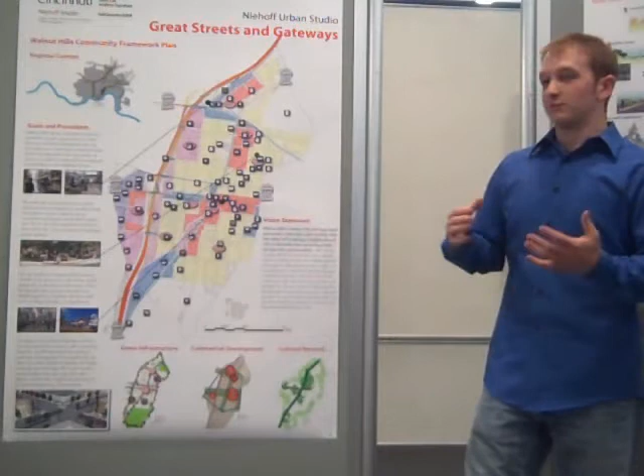So we began our framework plan with picking out one of the options of the interstate changes, and we picked S2A, which is going to put interstate exits here and up here, and then also linking that with a light rail transit system. That's a more regional scale, and then breaking down the neighborhood into several more individual pockets and focus on the community that way.

In terms of the types of things that we're trying to do, we want to create what we're calling a cultural identity for the neighborhood. We think that's what's going to bring in people as residents and what's also going to bring in people as visitors. So we're focusing on residential activity in types of quadrants, new business developments, historic type business districts, and cultural and community centers.

A green infrastructure system for aesthetic, ecological, and economic purposes, and we also are trying to, in terms of transportation, integrate streetcar into the city's framework as well.

So I guess three of the main group areas that we focused on are our green infrastructure, our commercial development, and our cultural network. And I think the first one to talk about is commercial development.

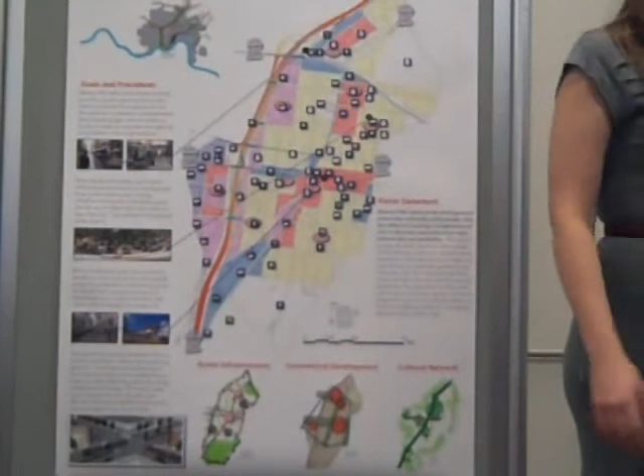Yes. My name is Andy Sanchez. I did the commercial and economic development. Here's my poster here. Could I ask you, would you mind pointing out and guiding us through those lower diagrams? Sure. So why don't you begin?

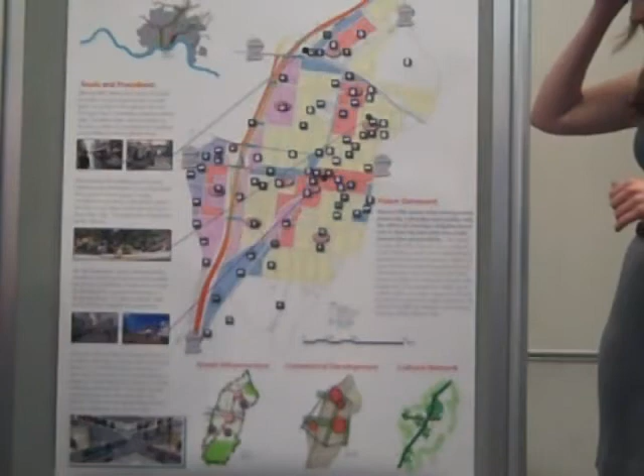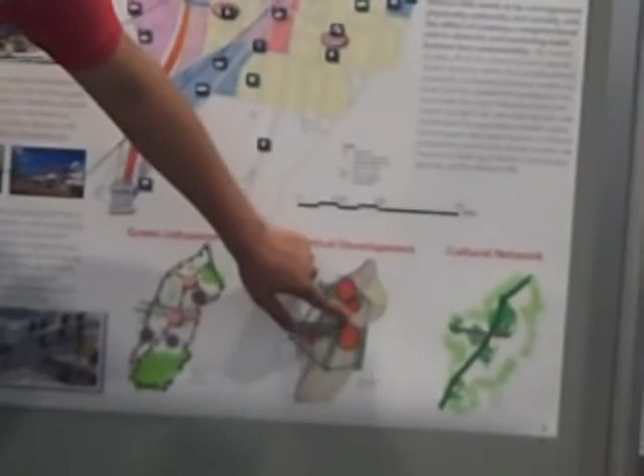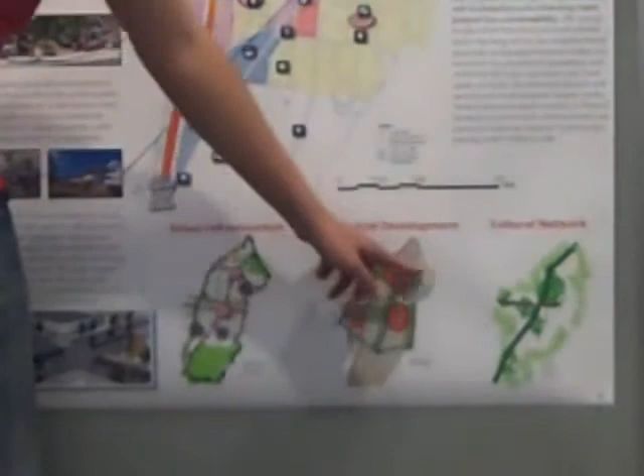Okay, so this is the commercial development. Green is the business corridors. This is the McMillan-Taft one right here. Here's the Gilbert corridor, Martin Luther King, and Victory Parkway. The reds are commercial nodes after our proposals, and the blue lines kind of go to my theory, which I'll explain right over here.

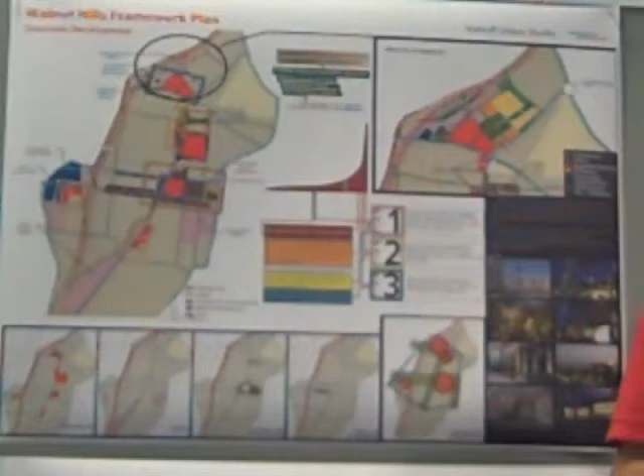The way I started out is we determined that the best aspect of the existing neighborhood is the business district. It has a lot of very unique architectural significance. There's some really cool buildings back there, a lot of which have fallen into very poor shape. We saw that as a big asset for the community, with the potential to put in some very unique character-driven businesses.

Going into the housing thing, it came out to like, okay, who's going to live here? Basically we determined that there are going to be families starting out — these are the new residents — and younger professional people. Those two demographics, mainly the young professional, one of the big things that seems really important to them is culture. They want the area they live in to be culturally significant and have its own identity, not like the suburbs.

Which brings us to this right here. So what we determined, which kind of guided our theory behind our designs, was: say this is a market, any market. This is the short head of the market, meaning that here is where you're going to find luxury lofts, condominiums, Starbucks, and Snuggies — just all the stuff that's cool and trendy. The in part of the market, profits going up this way.

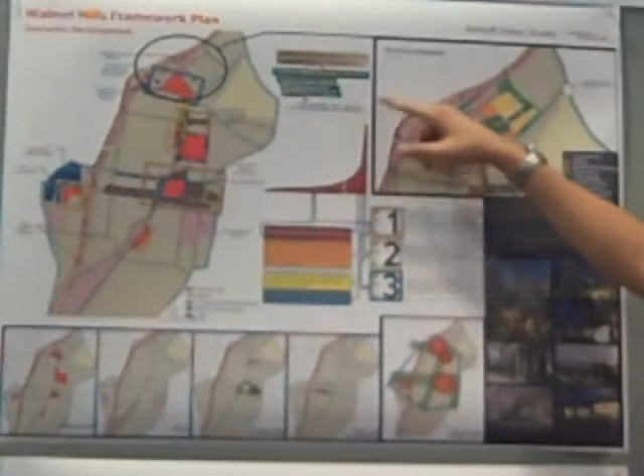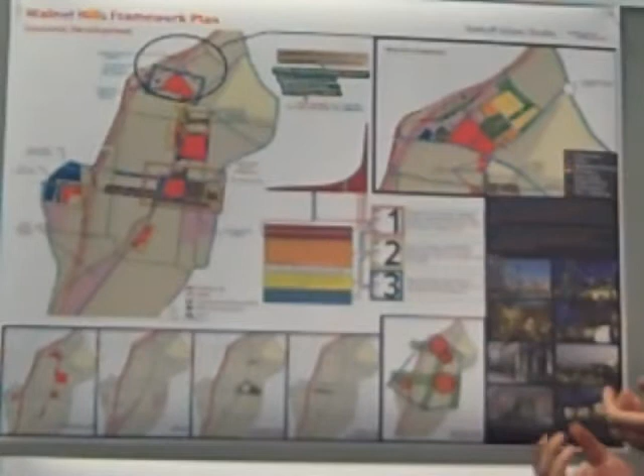The in part is more like how internet companies seem to make their money — they go for more personal approaches, and they'd rather make less money over longer periods of time, creating a sustainable business investment. Now to apply that to the business and commercial development, we identified this right here being your standard shopping malls, gas stations, all that, with the other side, the long tail of the market, being your independent, community-owned businesses.

So with that, I broke the businesses down into 3 tiers. Tier 1 were pedestrian-oriented businesses. These are the businesses that we wanted to create culture and a sense of place, which are in the existing business district. Tier 2 are auto-oriented convenience businesses. The goal of these is just to grab passersby.

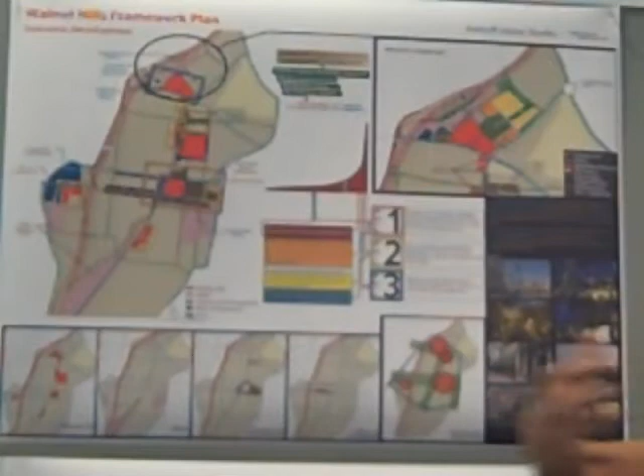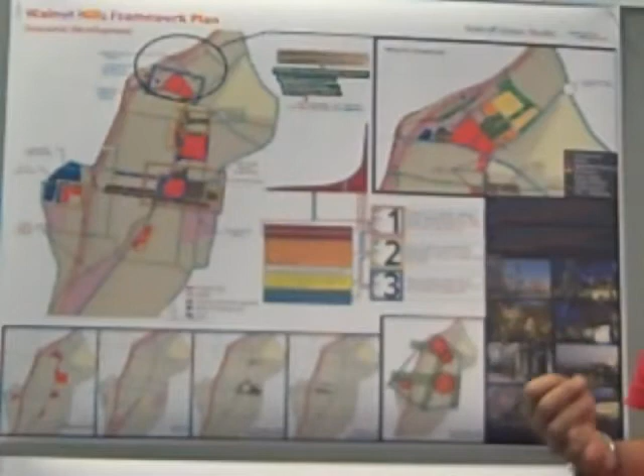So those are positioned up here to the north of the site, to the east, to the south, and to the west on McMillan where the new highway ramp is. In Tier 3, which are the large commercial businesses, we have one right here, our proposed grocery store, and the car dealership. I wasn't really sure what that fit into, but since it's very profitable, it fits into this category right here.

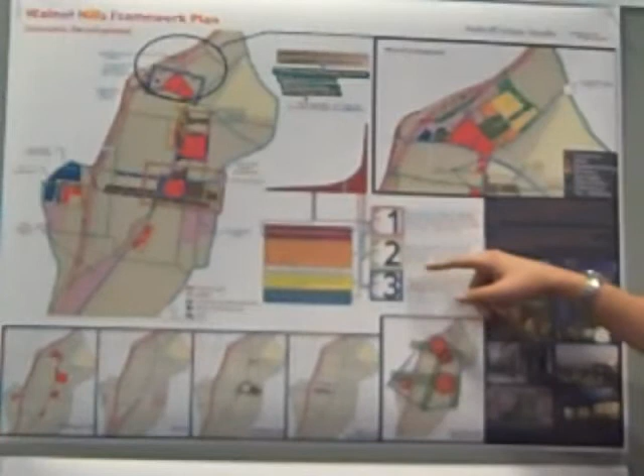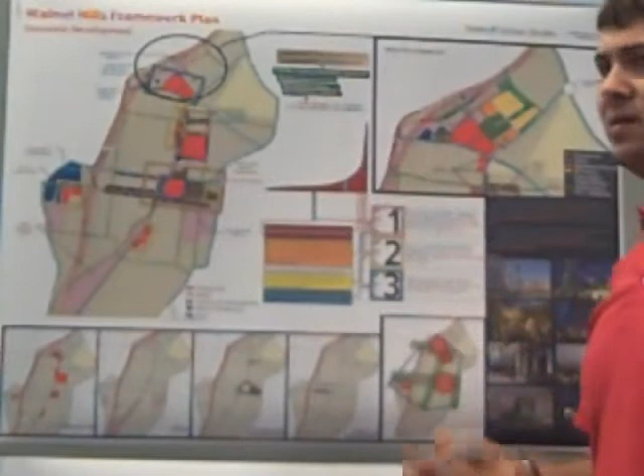So economically, Walnut Hills has a spending power of around $146 million. The way they broke it down was for investment staying in the community: $9.2 million is for restaurant revenue—there are a few restaurants, a handful of them. $3.7 million was retail—there aren't very many retail stores there right now. And $8.2 million was grocery, which goes to Kroger's.

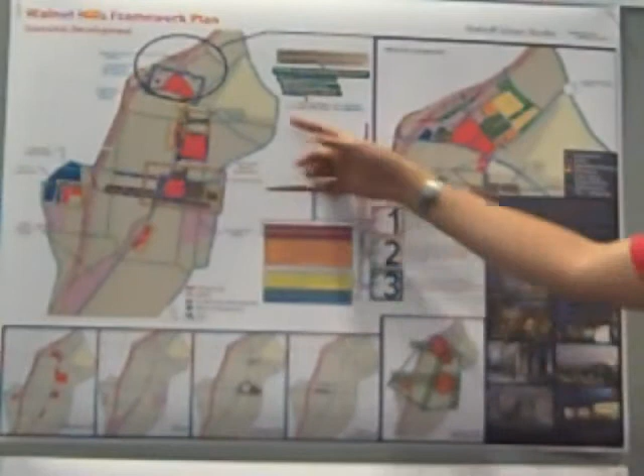Basically, what the Drilling Down report, which is what this all came from, suggested was that Walnut Hills has a spending power of $146 million. Well, all this adds up to $21 million. So they're losing $125.4 million to elsewhere, which is pretty significant.

Now, since I went a little further, I didn't include it for the Walnut Hills thing, but if you look at all the communities surrounding Walnut Hills, you realize that almost close to $500 million is leaving the area and going elsewhere, which brings us to this right here.

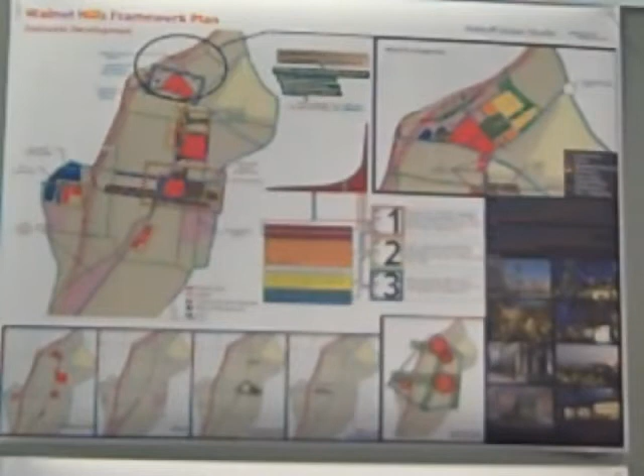We identified Martin Luther King and Gilbert Avenue. This corner right here, right now, it's a neighborhood—it's not in very good shape. There are a few houses back there that are decent, but we identified that as a major commercial point, mainly because you have the highway with our highway alignment.

It will feed people off right there, and you have two really big roads. You have Victory Parkway to the north, which does a little bit, which with this development would kind of funnel people back. So this site is sandwiched between Martin Luther King and Blair Avenue.

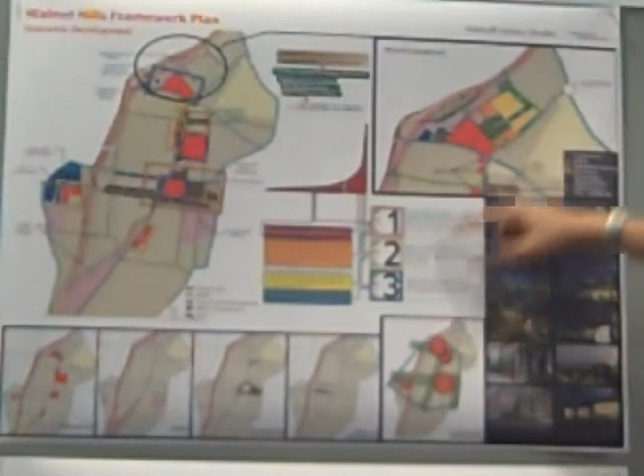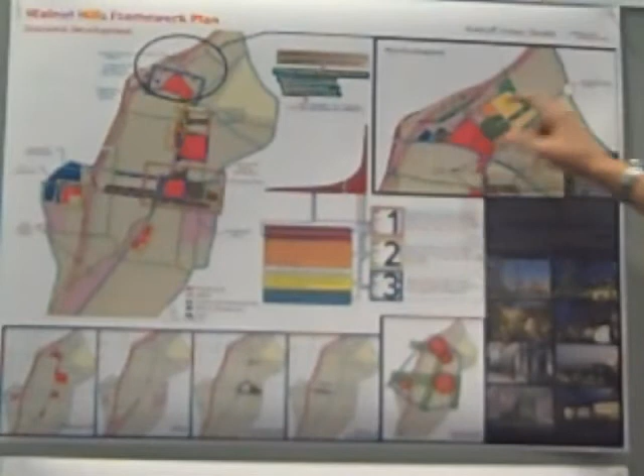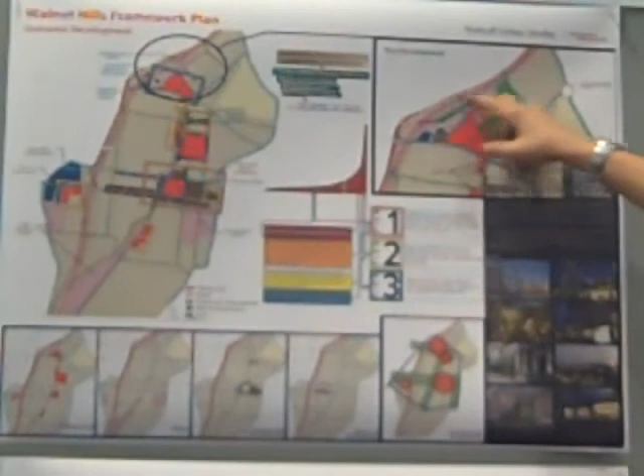We have commercial, Tier 3 commercial in the front, like shopping malls. We have some open space, high-density housing bordering Gilbert, and on the inside we have high-density office usages, which could realistically, more than likely, be medical. It'd be a lot easier, it seems, to get there than it would over by the hospitals. And some row homes, with most of the site's border being undevelopable for topography reasons.

Additionally, this area right here, where this block is, all the commercial, we'd have to bring it to grade probably with parking underneath because there are some pretty steep slopes there.

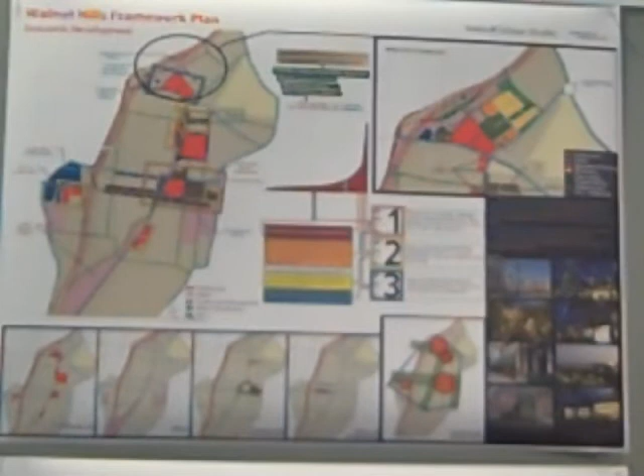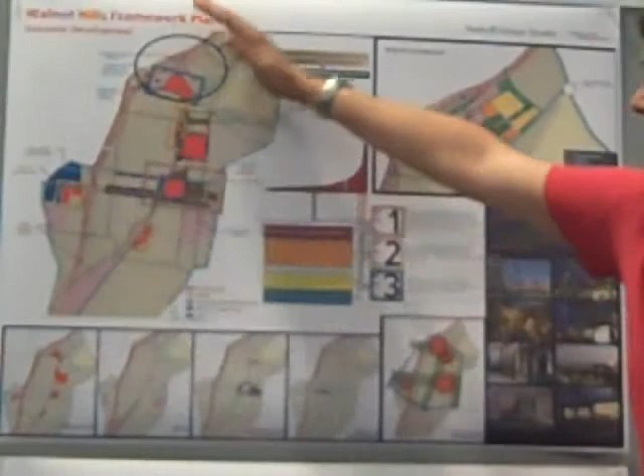So basically, the concept of the bordering businesses, going back to this right here, is that these businesses will bring people into the neighborhood to use the other outlets in the community, which is why you have that.

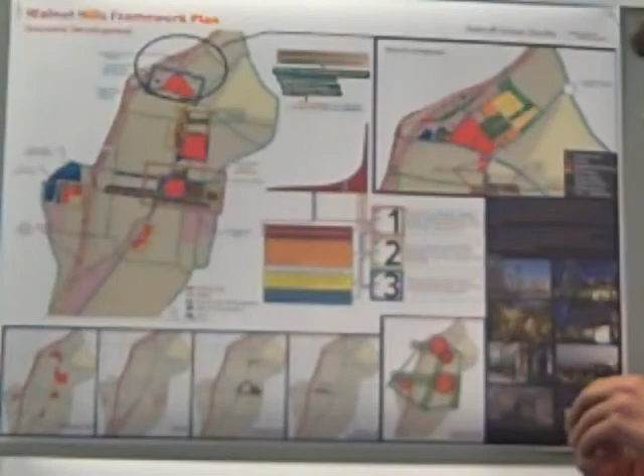And now she will cover the housing. It's not exactly the housing, it's connecting between the housing and the culture piece of it all. So we're trying to create a network of cultural centers, bringing it together as cohesive connections within the neighborhood, which is shown in this diagram.